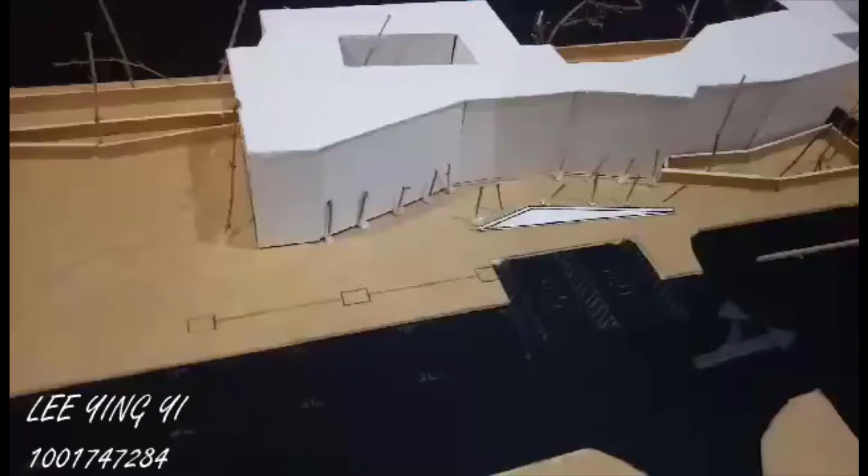Hi, my name is Ying and this is my site design response to approach, entrance, circulation and vegetation.

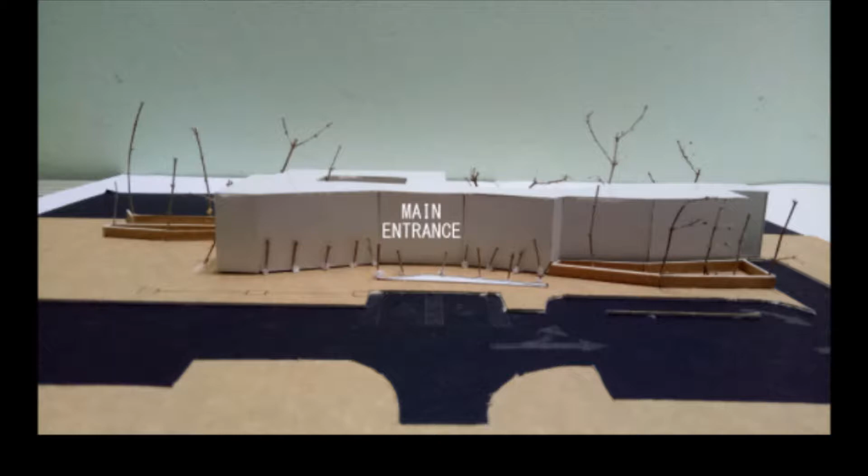There are two main approaches to the site, from the public road and the shop lots. My main entrance faces the main road as the flow of people and vehicles are greater, while the entrance at the side will be the secondary entrance.

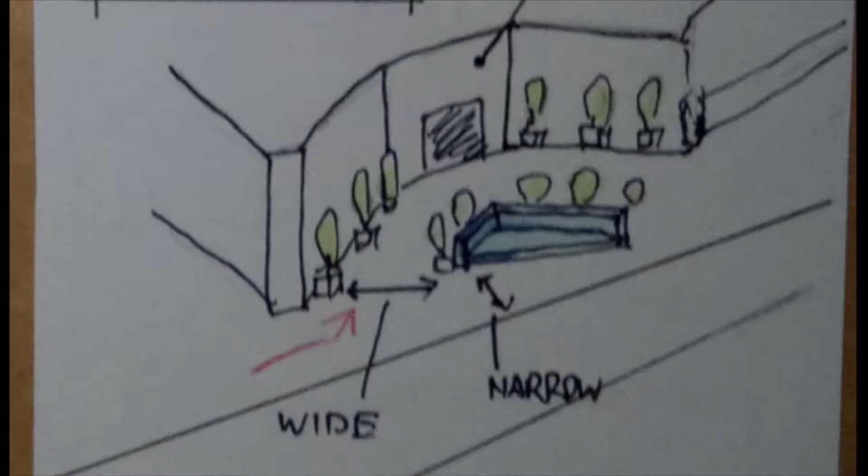At the main entrance, the entrance is set back inwards, creating a pathway leading to it. The width of this pathway is wider than usual, which encourages people to walk into the wider space rather than the narrow space, resulting in more flow of people to have a look inside the building.

Furthermore, there are plants arranged along the pathway together with a water fountain. By this, the approach to the entrance will be more welcoming.

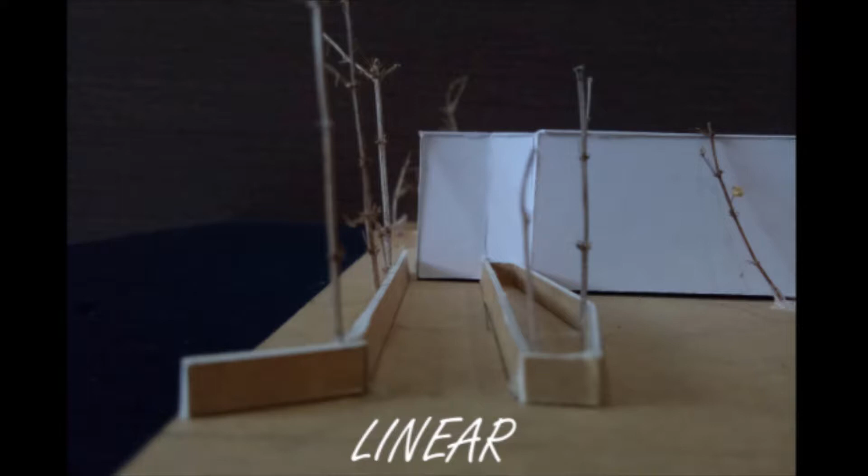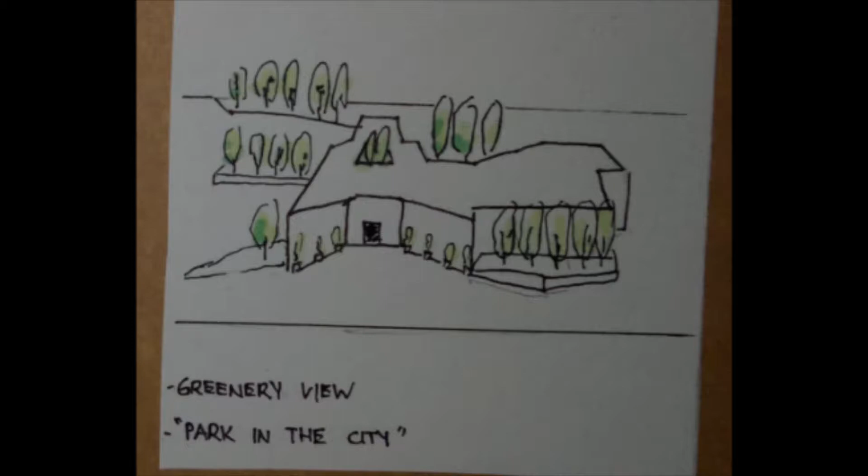For the side entrance, same as the main entrance, there will be high vegetation alongside the path, which also provides shade to visitors. As the existing site is a park with trees, I want to keep this identity, so when people approach they will see a building blend with trees. The concept is something like park in the city.

For the circulation, the red indicates the pedestrian circulation and the blue indicates the vehicle circulation. Here is the handicap parking, here is the loading bay, and here is the drop-off area.

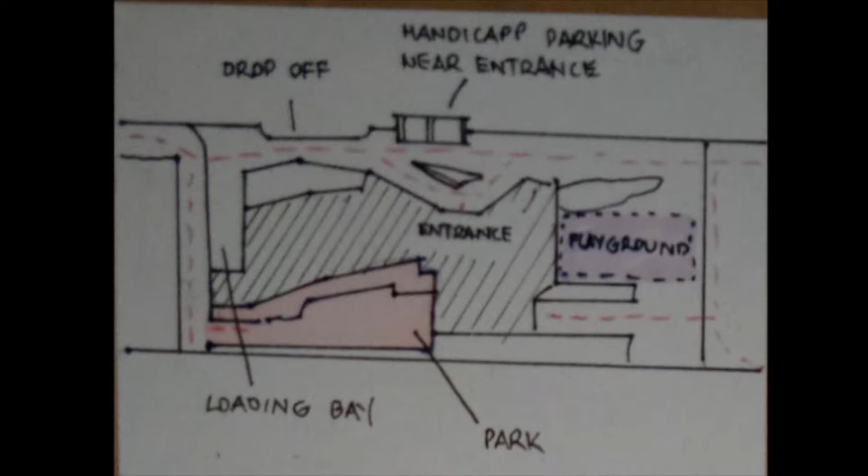There's a park at the back of the site, away from the crowded area. It is reserved for the residents, as the origin of the site is a park for them to have their leisure, so I placed it away from the crowded area so they can have their private leisure time.

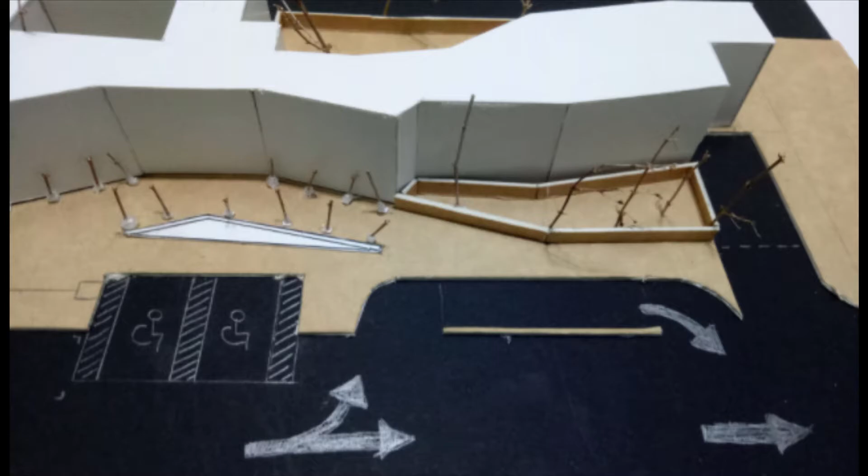The handicap parking is located right in front of the main entrance, so the OKU can have a shorter distance to the entrance. For the handicap parking, rather than having side parking, I arranged it into perpendicular parking, as it is easier for handicapped users to park their cars.

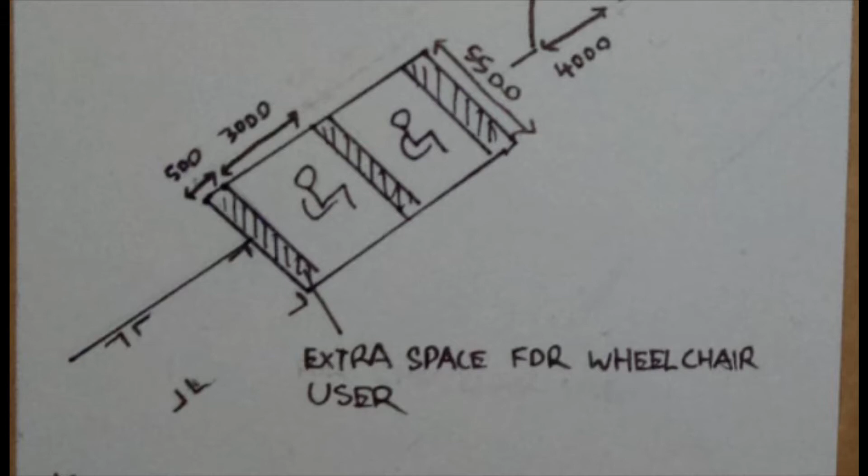The dimension of the handicap parking is 7.5 meters by 5.5 meters in total. Each parking space is 3 meters wide and 5.5 meters in length, along with 0.5 meter extra space for the wheelchair user.

For the drop-off area, also near the entrance, the width of the path will be 3 meters and 10 meters in length. The loading bay is located at the less crowded place, so that less people will see the workings of the back of house, and also to avoid accidents.

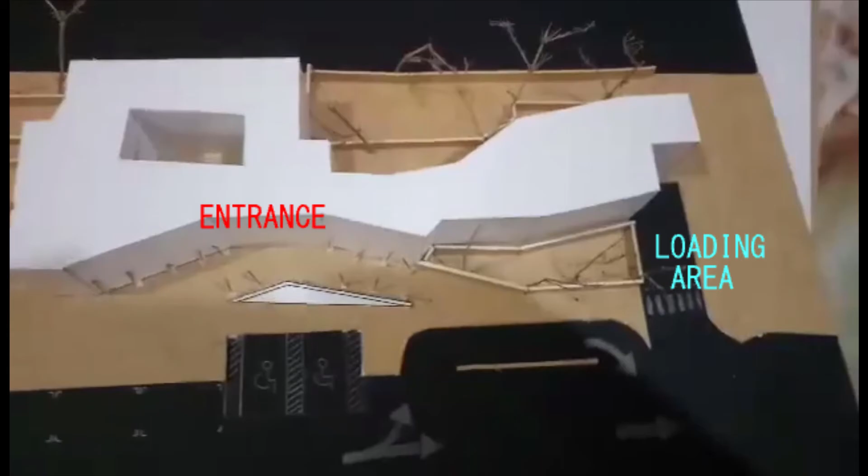The dimension for the loading bay is 4 meters wide and 8.6 meters in length, as the average small lorry is 2 meters by 8 meters.

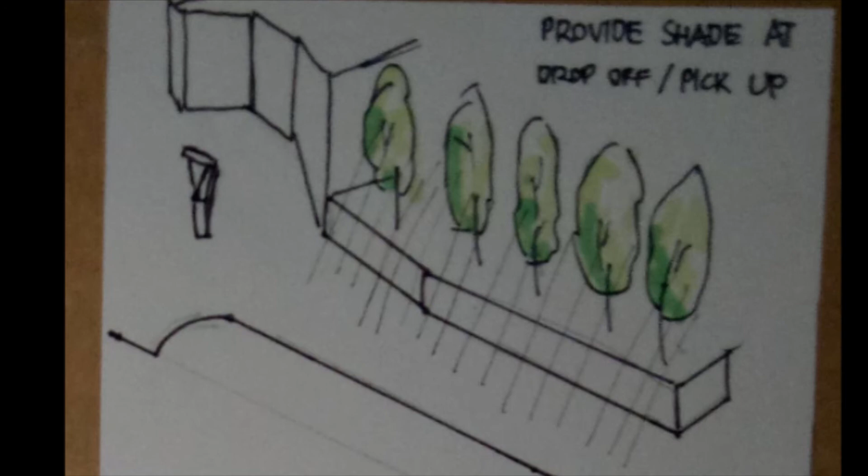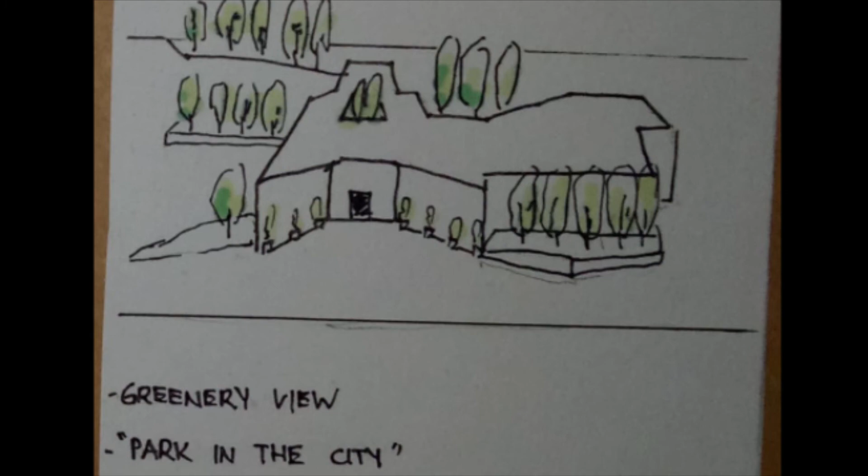For the vegetation, there is vegetation at the drop-off area to provide shade to people while they wait for their grabs or car. The vegetation located surrounding and within the building creates a greenery view for the visitors. The vegetation at the back will buffer the noise from the lower ground, which creates loud noise.